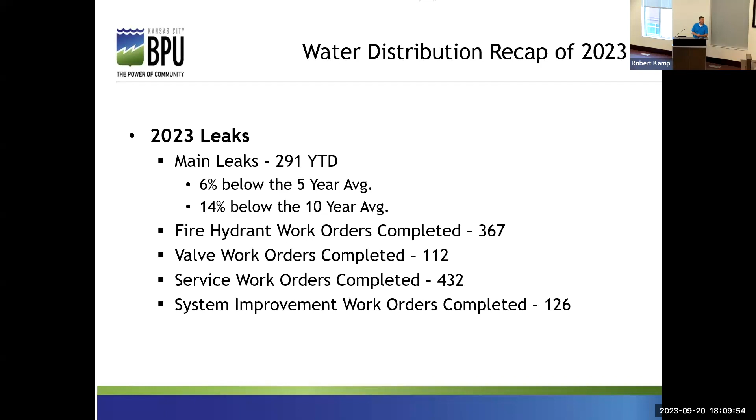So some of the things that we do to trend downward and stay below our 5 and 10-year average is increasing the longevity of our infrastructure. One of the most important things we do, we install sacrificial anodes. They're essentially just a magnesium core bedded in gypsum. And what those do, it's a more active metal, and it draws a stray current from the soil away from the metallic pipe. Every metallic pipe is susceptible to corrosion. So they're wired directly to the main, and they just provide themselves as a sacrificial anode to prevent corrosion on the water main. Another thing we do, we install polywrap.

It's a very simple procedure. It's a polyethylene encasement, and it serves as a barrier between the corrosive soil and the metallic main. In fact, in the picture to the left, you can see a repair that we conducted. Repair is actually complete, polywrap taped throughout the length of pipe. And if you look below the main, you can see actually the anode bag that's installed and wired to the main.

In addition to that, really some of the repair practices that we've taken on probably since the early 2000s - essentially, if we expose a water main and we see significant amount of corrosion, we go ahead and cut that entire length of main out, and we replace with new for the entire distance of the excavation. So those are all things that we do to try to prolong the life of our pipe.

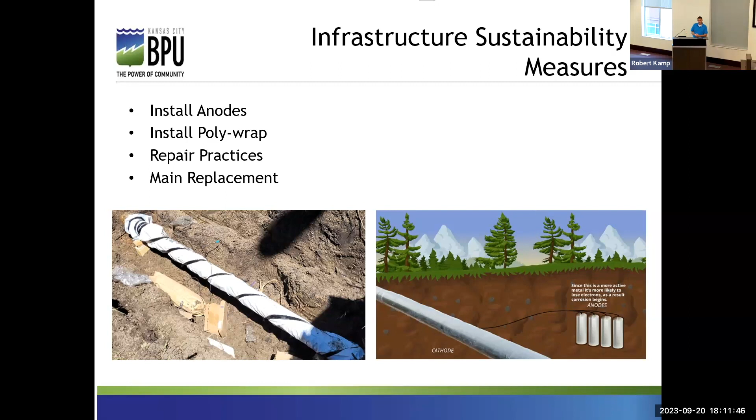One of the more significant things we do is main replacement. We all know that we near an end of useful life for infrastructure. So main replacement really helps us kind of bring those numbers down for our main leaks and keep us trending in the right direction.

So this here kind of just shows our trends since 2009 to 2023. Can't see early 2000s, but about 2002, we started installing Polywrap, which is the polyethylene encasement. And then about 2006, 2007, we started installing the sacrificial anodes. Obviously, there's some years, 2012, 2018, where we had a pretty significant increase in main breaks. It's not necessarily uncommon with weather-related events, kind of depends on what your usage is. But the overall goal is to see a downward trend, which is pretty obvious is happening.

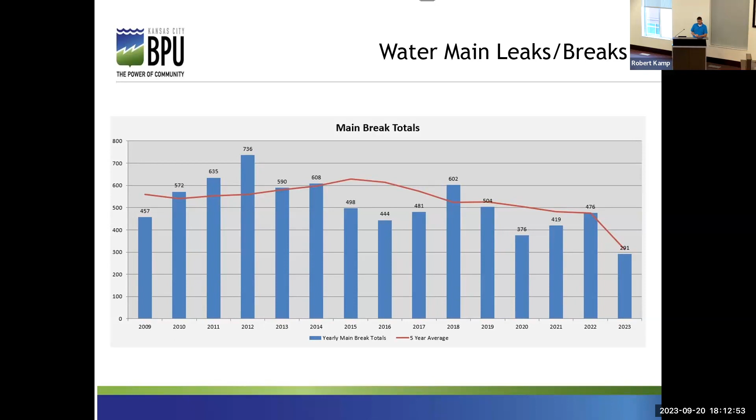Actually, probably about 2014, 2015 is when we began our first area projects, which was small diameter main replacement, which we had a lot of leaks on. And so we targeted those really hard to kind of take our leaks down. So it's been successful, kind of shows it in the numbers and things that we continue to bring that down.

Talking about main replacement projects, this year on Hutton Road we replaced 1,600 feet of 12-inch ductile iron pipe. Ductile iron pipe is susceptible to corrosion. We determined this particular pipe had outlived its performance, and in replacing it we took out about 12 leaks, so we took out a problem main there.

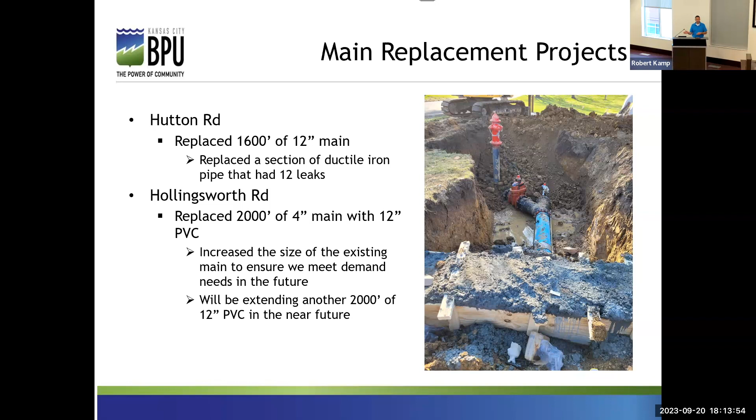On Hollingsworth Road, we also replaced about 2,000 feet of 4-inch pipe and installed 12-inch PVC. Our purpose was to ensure we can meet demand in the western portion of our territory. One of the projects with remaining work orders is actually in addition to this main replacement project on Hollingsworth.

We'll do about another 2,000 feet. In completing that, we'll have a 12-inch main running from Hutton Road to K7 on Hollingsworth. Another thing we've seen over the past several years is an increase in our transmission main work. As you can see, a lot of these are main leaks.

We had about 8 projects this year, many of them main leaks, some of them betterment projects, so that's really some of what we're going to start focusing on: transmission main inspection and repairs. Particularly at 18th Street and Kansas Avenue, we had a project where our crews in-house replaced 3 16-inch valves. They also abandoned 2 16-inch valves that were inoperable and unnecessary in our system. Of course, they had to reconnect the 30-inch and 16-inch mains.

And I've got some pictures of various projects, 55th and State, and then 14th and Douglas, in some upcoming slides.

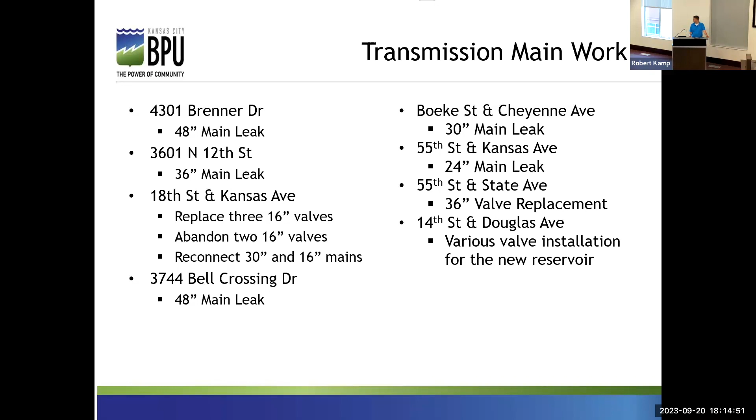The picture on the left is 30th Street and Cheyenne. That was a 30-inch main leak. We repaired the leak in-house, and you can see it's poly-wrapped, and on the right side of the main you can see the anode bag. Another thing I want to point out is the trench box around the perimeter, used for safety measures to prevent the trench from collapsing. I want to thank the safety team for their help increasing our safety culture, and it's paid off, with our guys using that to the best advantage.

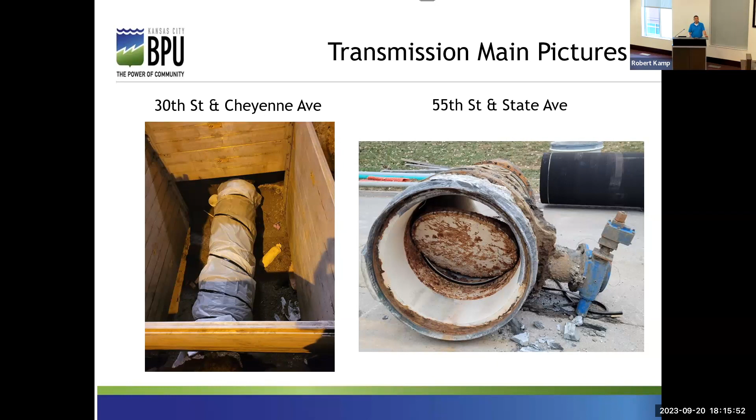The picture on the right is taken at 55th and State Avenue. It's a 36-inch valve that was inoperable. We excavated hoping to repair the operator, but it was not repairable. We moved to cut it out, and cutting it out we can see this is a 36-inch butterfly valve that's partially closed. Just examples.

This is the project I talked about, 18th Street and Kansas Avenue. These pictures show the scale and magnitude of the job. That's a 30-inch main, and the 16-inch mains are the smaller ones throughout the picture. That area is really riddled with aging, older infrastructure. We had a lot of conflicts, sewers and duct banks that weren't claimed by anybody, so we had obstacles to work around.

It was a really large scale project. The crews worked all day and throughout the night to get everything tied back in and get the water restored. We also had a lot of help from the carpenters on the light side with the traffic signal loops and restoring the concrete. It really was a joint effort, a good project to see everybody collaborating on, with a lot of teamwork shown there.

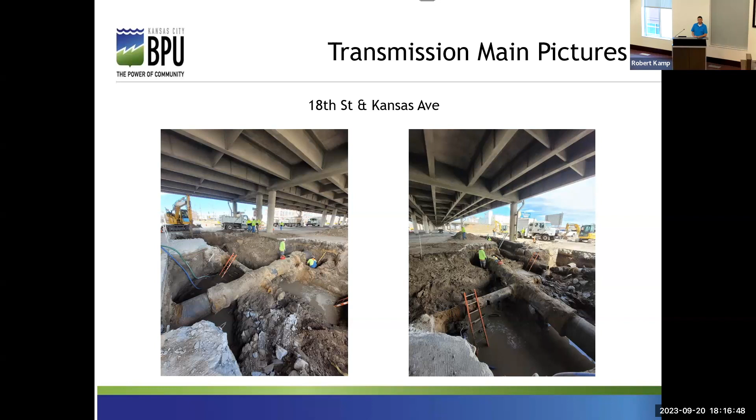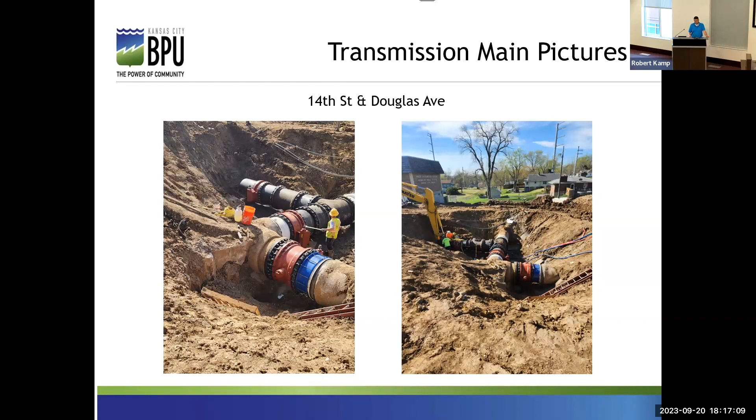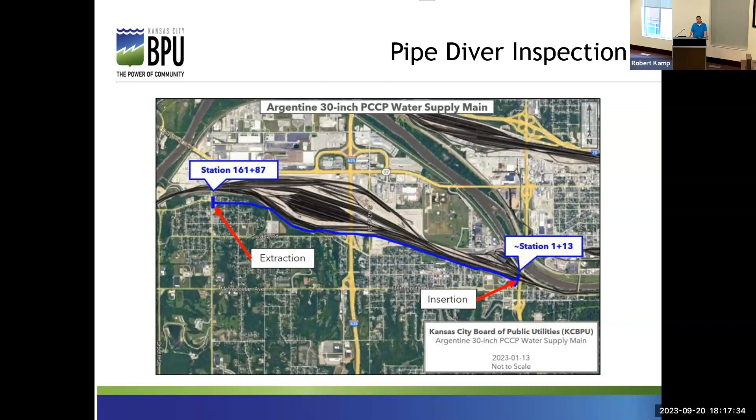So a lot of the work I've talked about is reactionary in nature, and one of the things we're driving towards is being proactive. With that, in late 2022, we conducted a pipe diver inspection on our 30-inch concrete main that runs through Argentine, roughly starting at 18th and Metropolitan and going to 55th and Clam.

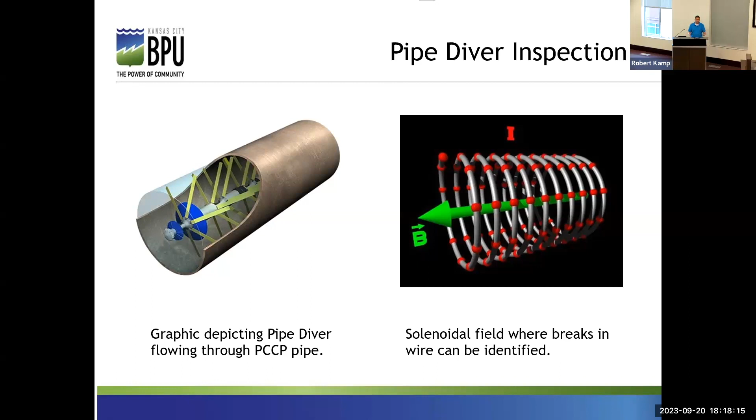So like I said, we inspected this main once before. The initial inspection was in 2016. At that time, it was reported that we had about 16 lengths of pipe that were distressed. Due to advances in technology during this last reinspection, we were able to reclassify those as not distressed. So some great news there. However, we did find one length of pipe that was newly identified as distressed.

So we'll work to see what needs to be done there. The first table here really just has some identifying information, start and stop point of the pipe diver inspection, but we went over a little over 3 miles that we inspected this concrete main.

The second table again has some identifying information, but really what I want to focus on are these last 3 boxes. Through the inspection, they classify the results as low probability of failure to medium to high probability of failure. So we fall on that low probability with 1 wire wrap broken. That gives us a sense of direction of where we need to go. This tool also has cameras, so you can get an internal visual of your pipe, and it takes GPS. So we're able to use that to determine where this wire wrap was broken. We can excavate and do some investigation to see if we need to do any repairs there.

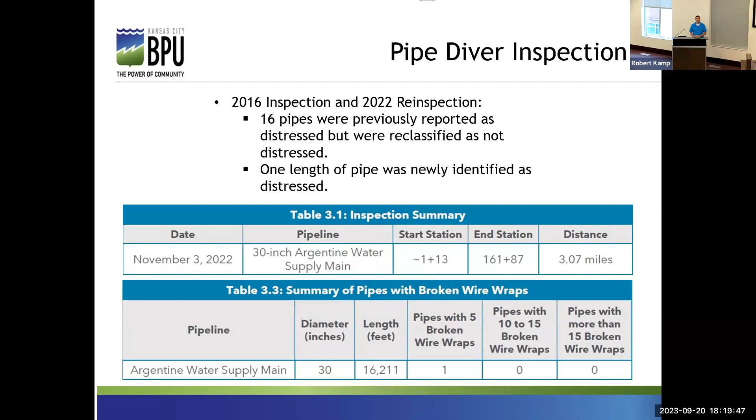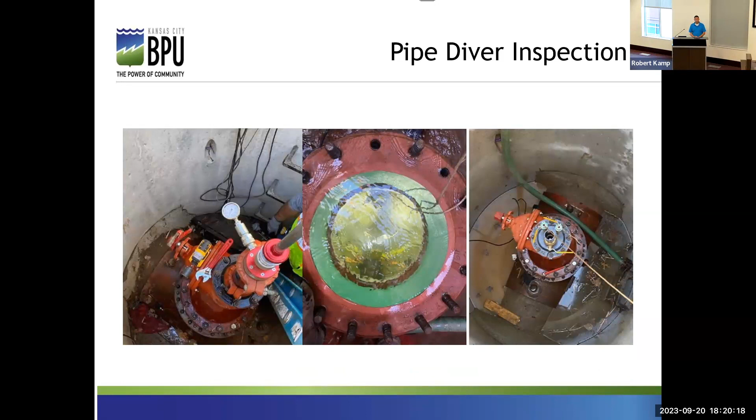Next slide, here are just some pictures of the insertion of the pipe diver. I know it's very difficult to see, but if you look at the middle picture, the center picture there, you can actually see it's an open 16-inch valve. And if you look closely, you can kind of see the yellow probes that are inserted there. That pipe diver is neutrally buoyant, and it's ready to be sent on down the line. So once it's inserted, we install some valves, some fittings, so we can monitor the pressure of the flow to ensure that it's moving at the right speed and getting where we need it to go.

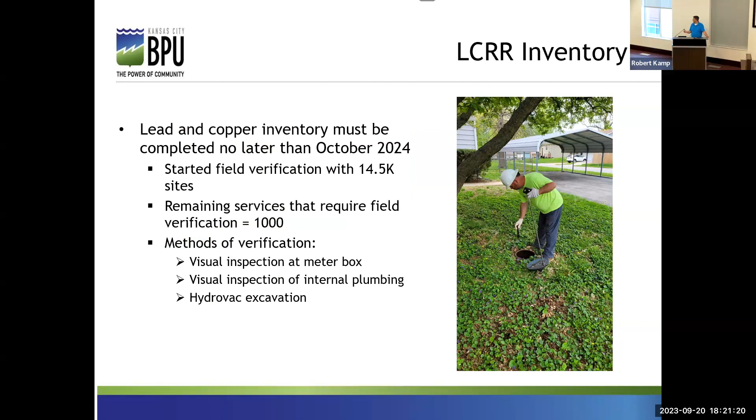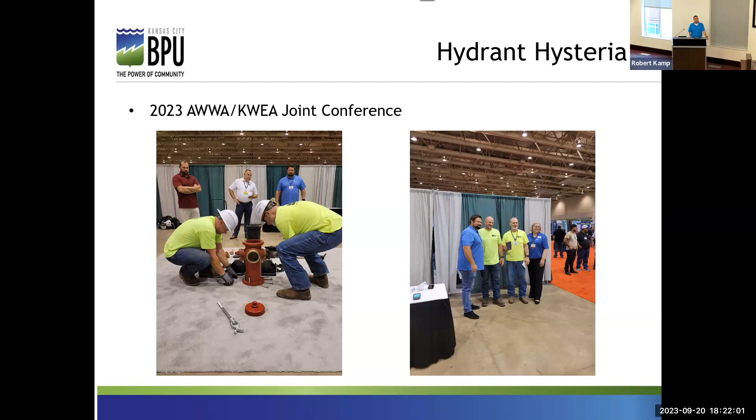Next slide. I really want to thank everyone for all of our hard work and efforts. We've had a lot of positive praise from customers this year. We work our hardest to work safely, efficiently, and really meet the customer service needs that they expect. We've had several employees get recognized, some of our supervisors. We actually have a couple of distribution supervisors here, so I want to take the opportunity to really thank everybody for their efforts, hard work, and everything they put into it.

And lastly, an update on our grant funding. We've submitted applications that have been approved. We're in the final stage of design for our first portion of this project, so those will be submitted to KDHE for approval soon, and we'll be bidding the job sometime around November. Once the bid process is finished and we receive approval from KDHE, we'll start moving forward with some small diameter main replacements, problem main replacements, and really do what we can to drive those numbers down. And with all that, we certainly can't do it without the help of our water engineering group, who helps us with all of our design, all of our transmission main projects, and then water processing's help too. They're really essential to our functions when we're working on transmission mains.

With that, that's all I've got. If anyone has any questions. Thanks, Marshall. Any of the board members have any questions?

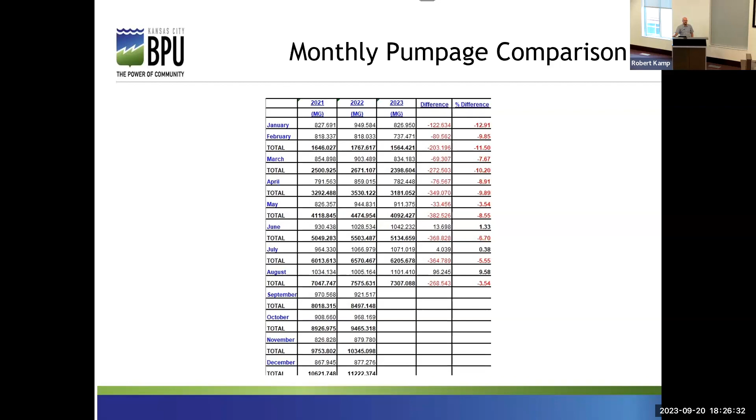Again, our average really hasn't changed. We're still pumping about 31 million gallons as our average per day. Again, this year during July, we did see some mid 40s, and actually we saw a couple 40s even in August. But you can anticipate that with as hot and dry as it's been this summer. I would have thought during that really hot spell we would have maybe seen a little bit more, but we got a little bit of rain, and rain really does change the way the treatment plant runs. So go ahead, next slide.

So here I wanted to talk about chemical prices, just to kind of give you an idea of what we've experienced, looking at it in a 10-year time frame. The yellow one up there is chlorine, and you can kind of see on average we utilize about 730,000 pounds of chlorine a year. If you look back at 2013, all the way up to about '21, chlorine wasn't fluctuating much, it stayed about the same. It was pretty common to have plenty out there in the supply chain. But if you look at what happened about 2022, you can see the price went from 32 cents to 71 cents, and that really was a big game changer because our prices are going up, and so we're scrambling to try, and it's not like you can just change suppliers.

So anyway, and then 23, we saw 79 cents a pound, and that's where we're locked at now. We'll be bidding that out next year. I do anticipate to see that come down some, and I follow that next number down, which is caustic.

If you know anything about the manufacturing of chlorine, through the process, the electrode they put in there, you get chlorine on one side, you get caustic on the other. So you can see from 2022, the caustic price went from 17 cents to our new annual bid of 13 cents. So 4 cents may not sound like a lot, but when you're looking at 1 million pounds, it's a lot.

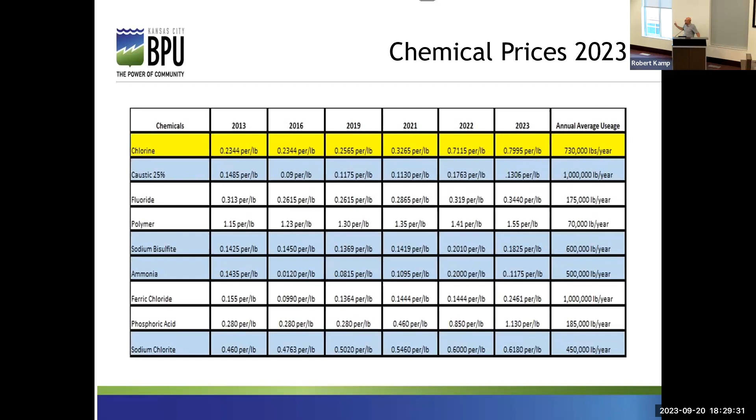So I'm going to go over a few pictures here about the plant. Some of the things that we have going on in the plant, everybody thinks, oh, the plant's new. It's 23 years old, and it's our goal to keep it looking new.

It's not something, they're pretty deep. They're probably about 5 or 6 feet, so it's not something that you would have saw. They were just small leaks, but we started changing some of them out. We got numerous runs around the plant, and those are, the operators use those for cleaning out our basins.

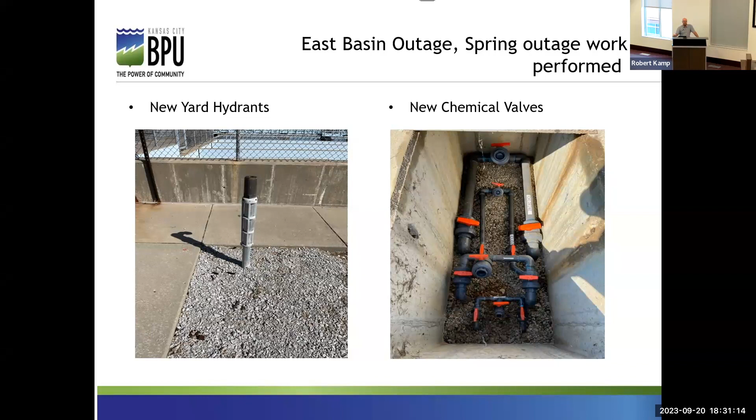So we did some of those in the spring. We have the west side, our west basin outage, that's going to take place in October, and we'll be changing those out as well. Next slide.

So we got 13 years out of it. I looked back and we spent about $9,000 on that in 2010. We had to install a new one because it failed in February. And we were very fortunate to be able to get that pretty quick because electronic supply chain is really, we're seeing things that are a year out, and some of them are even further. So we were very fortunate to get this. It's a powerful unit.

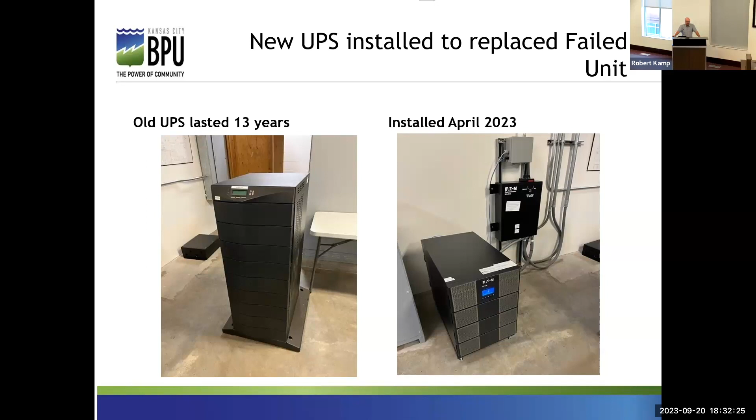It looks short, and it is. It's kind of how compact it is, but it has the same horsepower as the other one does, and it's actually expandable. We put new isolation switches in, but again, hopefully this will last another 13 years like the other one did. I can't stress how important that piece of equipment is to our plant.

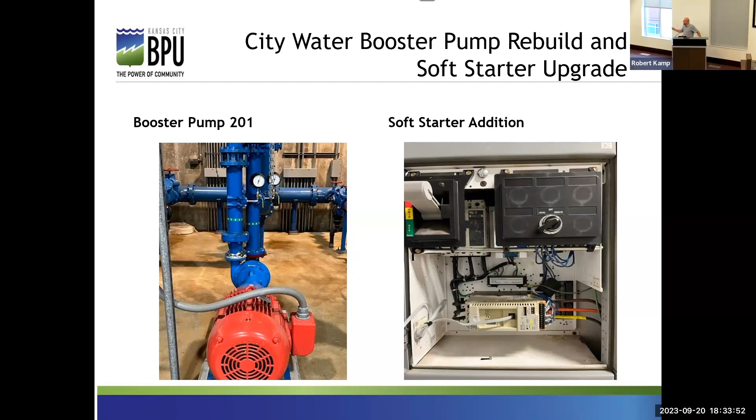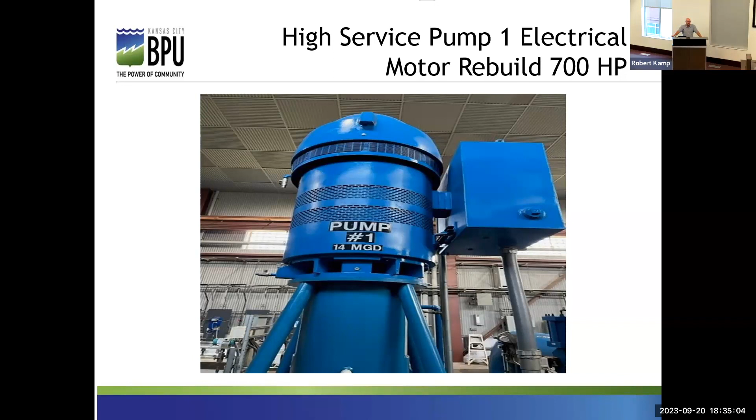But each time, we've just sent one out today—another motor from our collector well. These are things we're starting to see over time with our big assets. They're not premature failures, they're just starting to come to the end of their life. Bearings wear out, they start pitting, making noise, and the last thing you want is a catastrophic failure. For example, this pump was about $16,000 to repair, but the price to buy a new one would be over $100,000. So we're doing this as somewhat preventative, but also corrective.

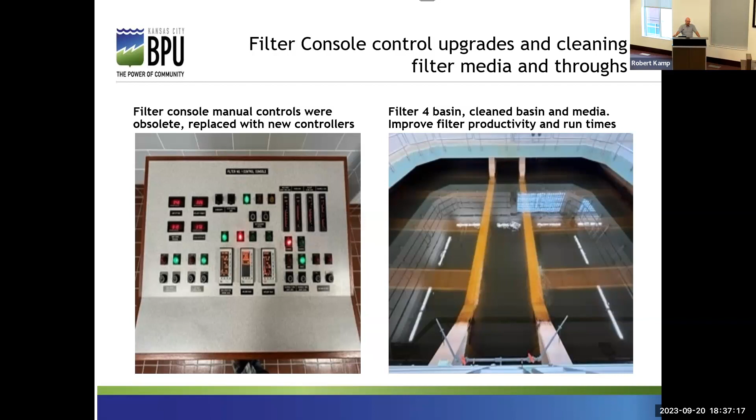For example, if we noticed we were getting shorter filter runs, maybe 55 hours, and we could get that up to 65 or 70 hours, it was money well spent, because we're not having to wash those filters as much. We're really just taking care of that media so it doesn't prematurely fail over time.

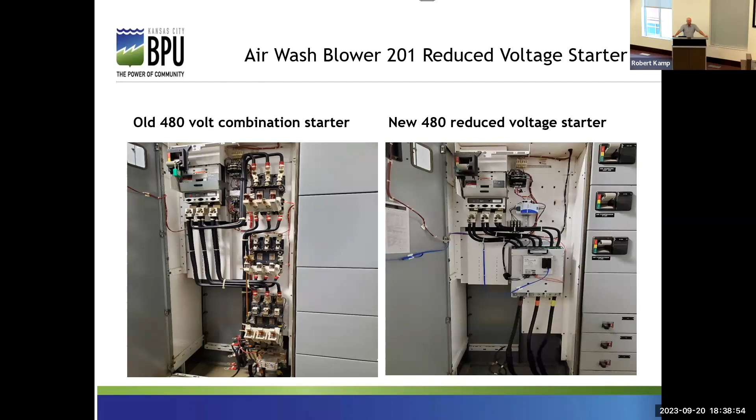The picture on the right is the new reduced voltage soft starters, and you can see it's all electronic. These run about 25 to 26 thousand, and with all the extra stuff you're looking at about 30. So I look at it as a big cost saving, and there's really not much maintenance to do on it. You're not worrying about the contacts, having to refile and clean them, and all the work that goes with a combination starter. So we're looking at all of our larger loads and trying to come up with ways to install these reduced voltage starters, because the price has really come down.

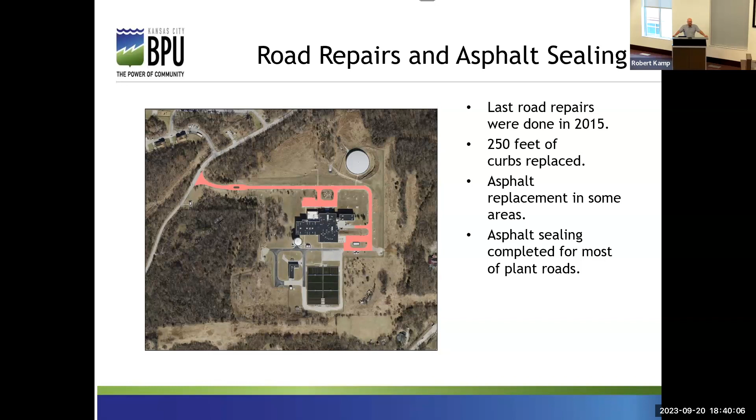So we were able to do about 250 feet of curb replacement, and we've got about that much still to go, but we got a lot done. We got the asphalt resealed in the pink areas. Around the back of the plant, we still have to do, and we're probably going to be looking at a little more asphalt replacement back there. Then in the near future we'll be looking at a lot of concrete too, since some of those gray areas are concrete that will have to be repoured.

Now I'm going to talk a little bit about district metering. This is something we all work together on—engineering, distribution, and the water production team. Our electrical engineer has really been looking at all these different types of meters.

We've got several of these solar panels set up at Tonganoxie, but for some of our wholesale customers, that's something we've been lacking. We only have one meter, really two meters, in our wholesale that we can kind of see live stream. We can get data, but it's old data, and when we're operating the plant we want to see it live. This is 2023, so there are ways to do it, and we're making it happen.

I'm really happy with the guys, our distribution folks who help us, and engineering. This is a coordinated effort to really make sure we're getting accurate meter reads on all of our water.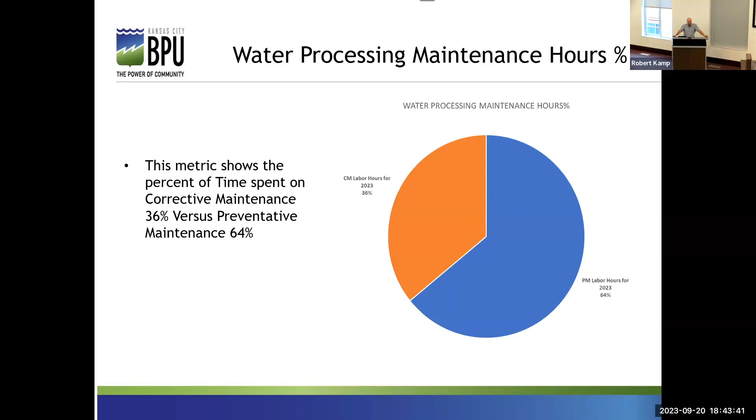One of the things we don't talk about is that one work order in preventative maintenance might be like a whole basin, and that basin takes 2 weeks to complete. So that takes a lot of time. And when you go back to that number of 380 and divide it by 4 maintenance personnel, you're looking at about 100 hours each. But again, this just shows that we are spending our hours on preventative versus corrective.

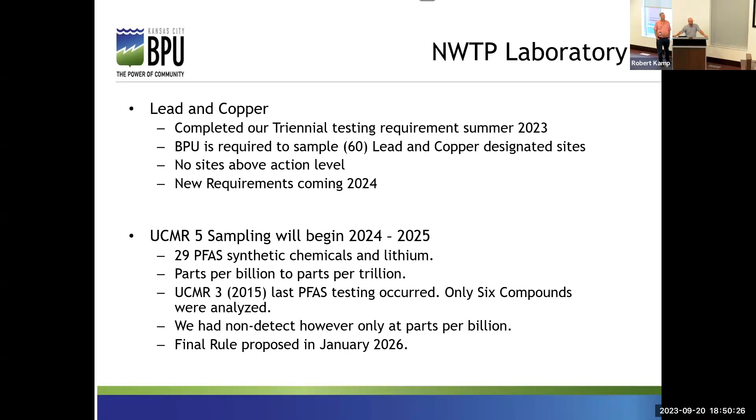All right, thank you. Thank you both. Yeah, thanks. So again, operators -

One of the things we're looking at now is operator scheduling, and how we get them into a shift. That's our goal, and why do we do that? We're looking at some safety concerns. It's a big plant, they've got to move around, go to off sites, the active flow, collector wells. The plant's getting old too. We have valves that break in the middle of the night, they can't be downstairs working on a valve. Water might need to be changed in the distribution area. So again, we've reached the goal in operators and that's really a good thing.

So I'm here to, thanks for that. I really appreciate that, and I think it's going to be really good. Next slide. So really in summary...

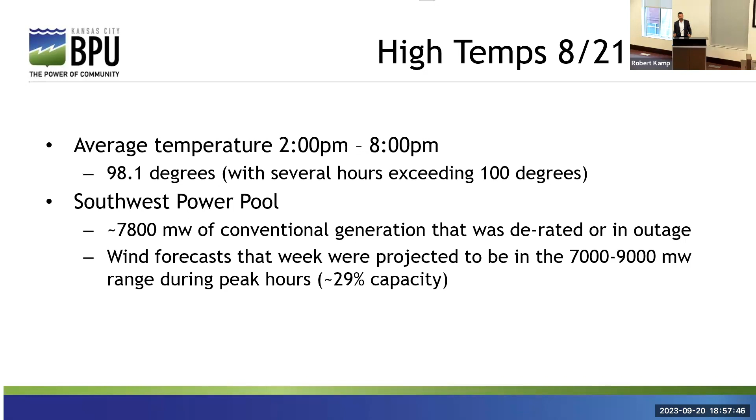As SPP is setting the table for the week, knowing we're going to be in some extreme conditions, those are the things they look at. The wind forecasts were about 29% of what SPP's capacity is, a little lower than what we'd see in more of the shoulder months. So obviously with the peak temperatures the way they were, the lower the wind output, the more strain there is on the traditional generators and the more need we have for those generators.

Next slide, please. We didn't have any EEAs issued that week, which was good. On Monday they were actually anticipating it. Weather advisories, resource advisories, conservative ops throughout the week. They were closely monitoring it.

One of the big factors, SPP was able to import 3,000 megawatts that day from neighboring RTOs. Monday we reached a new peak in the Southwest Power Pool, which is 5.5% higher than last year's peak, so a pretty significant jump. Importing the megawatts from the neighboring RTO was critical in providing the operating reserves needed to avoid issuing any EEAs, so that was the big thing.

You see the generation mix at that time to kind of give you an idea of what's getting used across the footprint. Wind was in that 8,000 megawatt range, and you see the gas units were being heavily utilized with the price of gas being as low as it is right now.

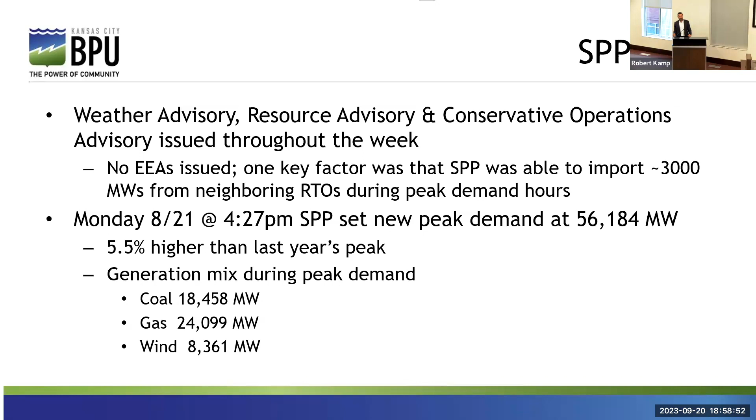Next slide, please. So just to give you some perspective on our group when temperatures are high and what our system operators are focused on: obviously the higher temperatures lead to higher load, we know how that works. It also lessens the efficiency of the equipment, the transmission lines, the generators.

One of the primary concerns we monitor, which is the biggest risk to our system, is when that transmission system voltage gets lower, which happens in high temperatures. We want to try to make that system as stable as possible. Worst case scenario would be localized load reduction, shedding load, things like that. So we utilize the equipment we have available to support that voltage, the reactive resources that help offset that declining voltage on the transmission system.

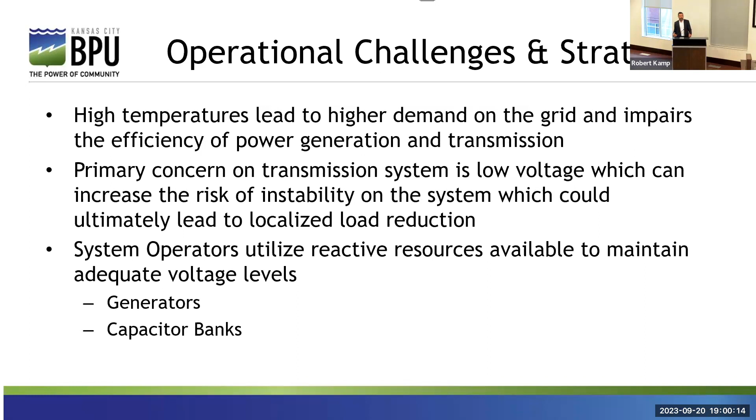On the 161 system, for the most part the only reactive resources we have at our disposal are the generators. So what the system operators will do is set the table in the morning. They know what the temperatures are going to do, they've got a pretty good idea of what kind of load we're going to see, and they'll start manipulating the generators to help push out the VARs to support the voltage on the transmission system. That's something ongoing, manipulated throughout the day.

There was reference to capacitor banks. On the distribution system we do have capacitor banks, which is another reactive resource that can help support voltage when they're in service, just as an example. So we're monitoring the transmission system, and we're also monitoring at the distribution level. We've got equipment in the substations, the distribution substations that we're monitoring, the circuits that feed a neighborhood or feed a house. We want to make sure those circuits aren't overloaded, they're not approaching limits, and oftentimes they do.

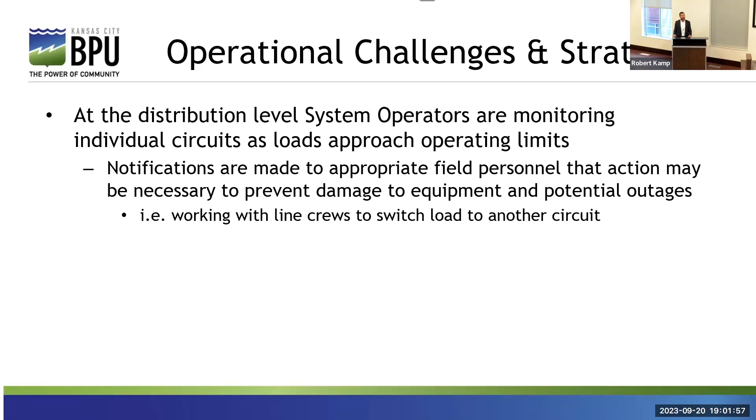Next slide, Robert. The other thing I wanted to touch on was our CTs and how they were utilized this summer. You may or may not remember, in May, we had a fuel nozzle replacement on CT4 that we did a budget transfer for.

CT4 has been extremely valuable in the market this summer. You can see the days that it ran. It's been very reliable, and given our location in SPP's footprint, there's a significant amount of load here, so a lot of the generation in this area has more of an impact. A lot of times you'll see our generators, especially the CTs, getting utilized more so than some that may be away from these load pockets.

There's significant value based on location, from potentially alleviating congestion to obviously serving the localized load there. So there's a lot of usage we'll see when we work through the CTs, but CT4 has been great. I didn't have the updated September numbers, but it's still running often. So, next slide.

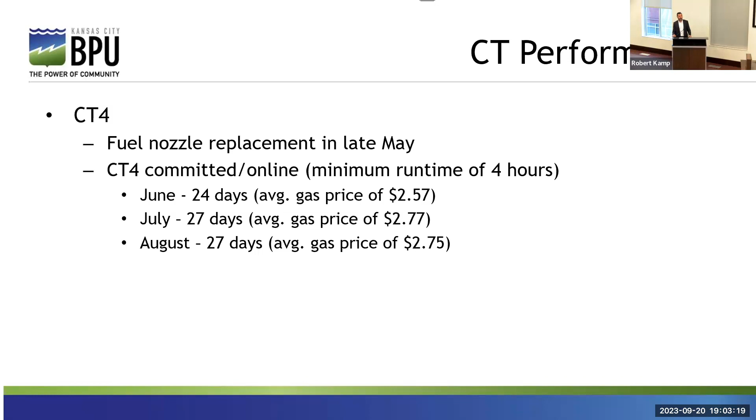On CT2 and 3, just a reminder, I know you're familiar with the CSAPR rule, but operationally, one of the things we have to stay engaged with - we work with the environmental group and the production group and make sure we don't exceed any of the environmental restrictions.

So the main thing for CT2 and 3 with the low mass emitter status is during the ozone season, which is May 1 to September 31, we've got a decreased amount of hours that we can run them, which operationally are the times we'd most likely need the CTs. So throughout the year, we're in constant communication, trying to balance that.

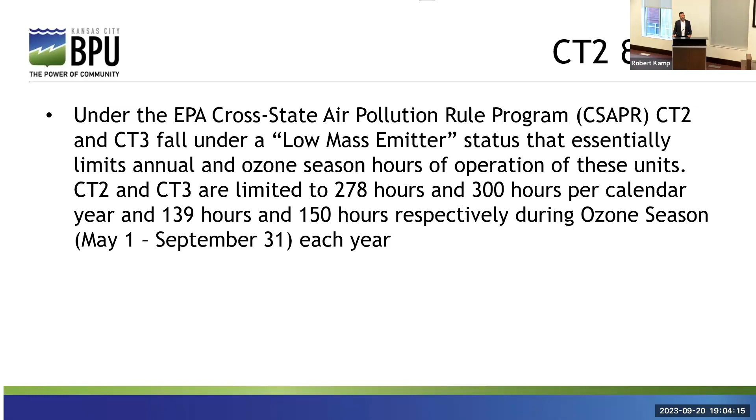To ensure we don't go over, but we also want to be able to use the resource as much as possible. So when we go to the next slide, I'll be able to talk to you about some things we can do strategically to help offset that.

Another question that comes up a lot, being in the Consolidated Balancing Authority with CT2 and 3, is what are some of the reasons they get called on, and some of the needs that SPP sees. I talked a little bit about our location in the higher load area.

So the market would be an economic dispatch, you guys are familiar with how that works. One of the primary things CT2 and 3 get utilized for is operating reserves, and one of the primary drivers for their value is they're able to be online, synced up, and generating megawatts in about 15 minutes. So when operating reserves start to get lean and SPP sees a potential issue, they have resources like that throughout their footprint where they can get those generators up and running and online to help provide those operating reserves.

They have a minimum requirement of operating reserves that they have to have available at all times, so there's a lot of value in that. We also talked about alleviating congestion - that's a big one, especially given our location, and something we haven't done, but may be necessary. We talked about reactive resources and support for voltage - we may actually self-schedule a CT if we're seeing low voltage and need more reactive resources. All of ours were pretty much online most of the time that week anyway, so we were able to utilize those for that.

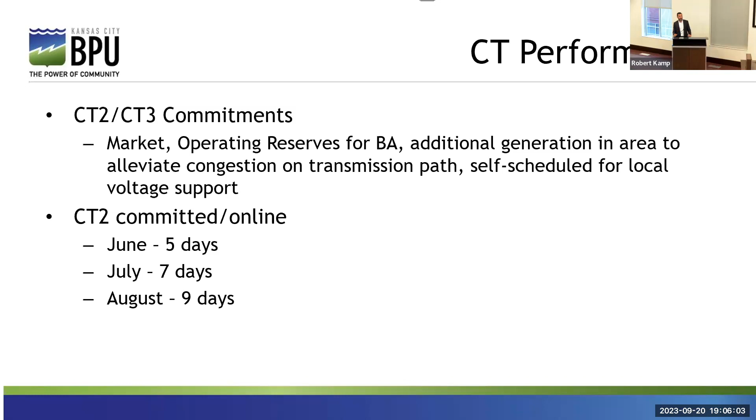The runs for CT2, and it could have been any of the reasons that I listed there: 5 days in June, 7 in July, and 9 in August.

So with a couple weeks left, we've got 6 hours left of ozone hours for CT2. So we knew we were getting close and we knew we were getting through the hot months and we wanted to still be able to leverage it and also not risk our

capacity requirements as far as making that unit available and being able to count that towards capacity and things like that. So one of the things we could do to hedge that is we offer the unit in reliability. So it takes economics out of it and it would only be utilized in some sort of event that would require that unit run to maintain reliability.

So since we've done that to kind of hedge against those 6 hours, we're still making it available. We're fulfilling that requirement with SPP, but it hasn't been committed. So we're not going over the 6 hours, which again is that balance. We also adjusted the max runtime down to 2 hours to build in another buffer if it did get called on. We know a lot of times when it's already on, they may bump us out another hour or so. Adjusting that max runtime protected us against exceeding that 6 hours of ozone that we had remaining also.

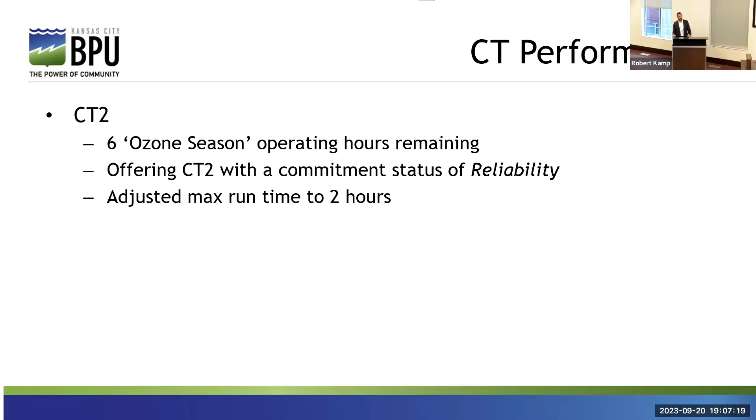Lastly, the EMS upgrade. There's 3 phases to the upgrade. This is the current phase and we're nearing the end. This is where we collect all the data that we have in our SCADA system. And we essentially test the compatibility with the updated code for the new system. So it's a lot of in-house testing. GE Grid, who's the vendor that we're using on the build out, they're building out their system to be prepared for phase 2.

Next month, which will be October. We should be kicking off phase 2. We've got the testing almost wrapped up in-house, testing the data to make sure everything's compatible with the new code. Next step will be building out a test lab in our group to start migrating displays over, essentially a mock-up of our old system to make sure the displays work, to make sure we're getting the data dumped in the way we need it and it's accessible. The information that we need is accessible.